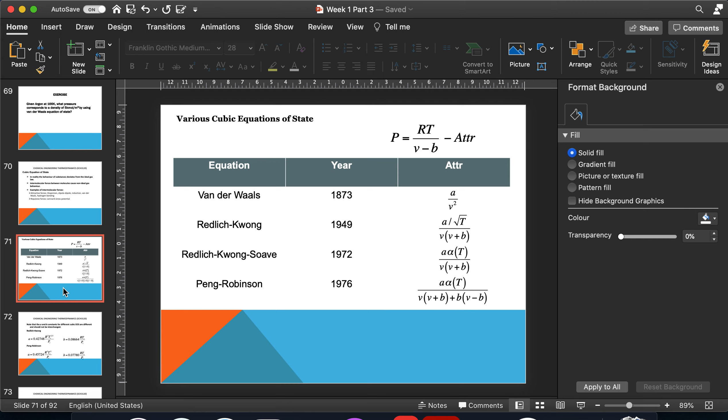Several attributes for the cubic equation of state, whereby it represents differently. So basically, they have A and B, but please be careful for Redlich-Kwong and Peng-Robinson, because their definition for A and B is quite different. So they should not be interchanged.

All right. So for Redlich-Kwong, you can refer to these ones, A and B is presented by this equation, by this term. And for Peng-Robinson also, this is respectively, it is almost equal, right? So don't be confused, just the value is different.

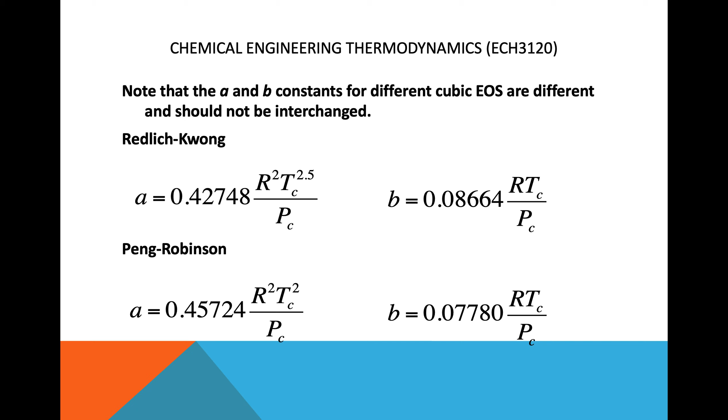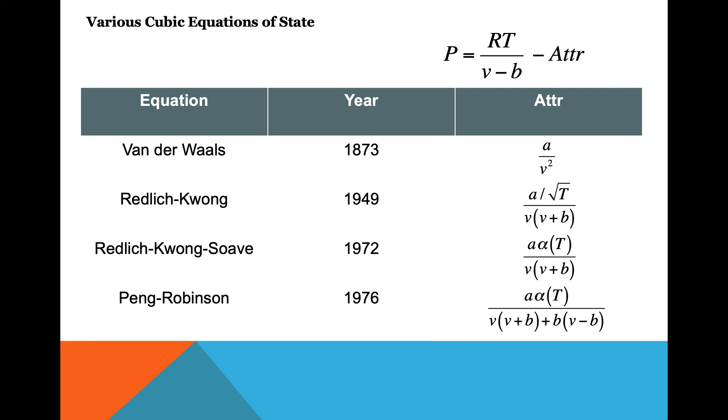Okay, I have one question for you. You can give your opinion in the comment section below. There are several and various equations of state, right? So can you identify, or maybe give an opinion, what are the differences between one equation and another? Is it similar, and if so, why? And if it's not similar, why? Okay. All right.

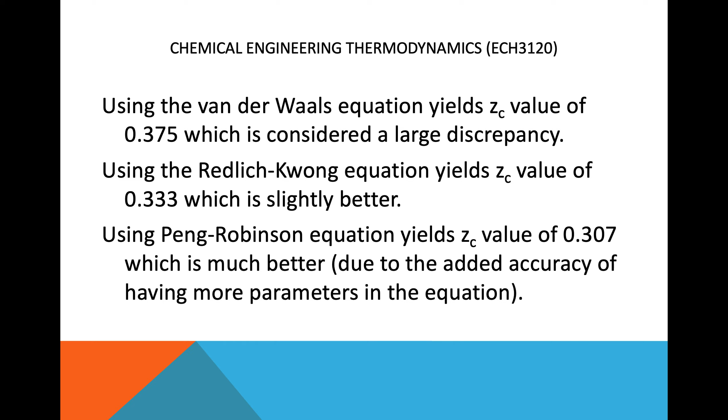Okay, using the van der Waals equation. Oh no, I think I have to skip that one.

Okay, next one is the virial equation of state, whereby the power series expansion in P is expressed as PV equals A plus BP plus CP squared plus DP cubed. If B we can represent as aB, C by aC and D by aD, then you can rephrase it as PV equals a times, in bracket, 1 plus BP plus CP squared plus DP cubed, and so on.

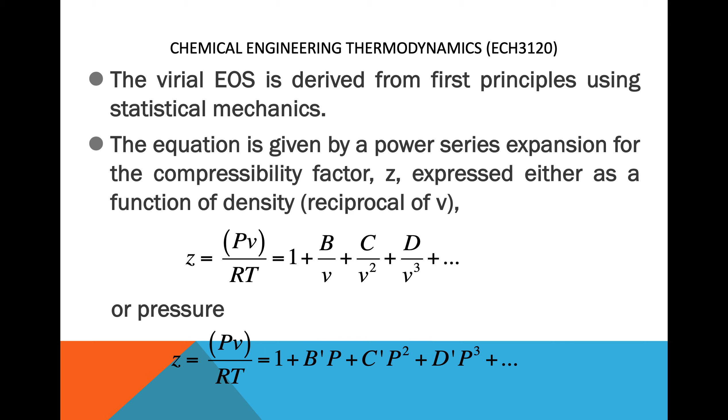For the virial equation, the virial equation of state is derived from first principles using statistical mechanics, and the equation is given by a power series expansion for the compressibility factor Z, expressed either as a function of density, which is the reciprocal of V, PV/RT equals 1 plus B/V plus C/V squared plus D/V cubed and so on, or pressure. It can be in terms of volume, reciprocal of volume, or pressure. So for the pressure, this is accordingly.

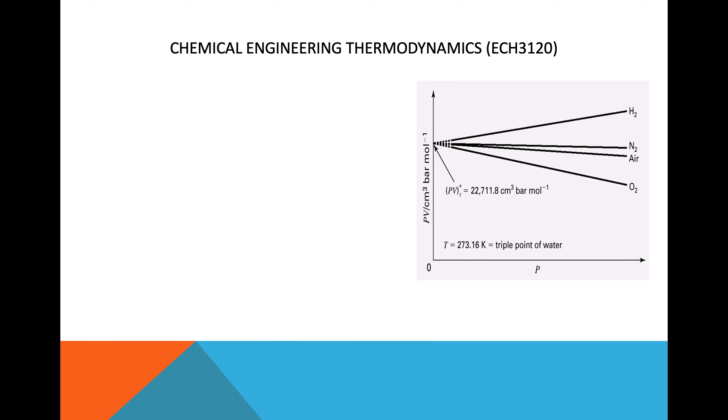And we can see that for the ideal gas, at constant temperature, as P approaches zero, the limiting value of PV will be the same for all gases. In this limit, it becomes PV equals a, a function of T, because the limiting values are used to establish a T scale which is independent of the gas used as the thermometric fluid. So this is one statement that you can take note of.

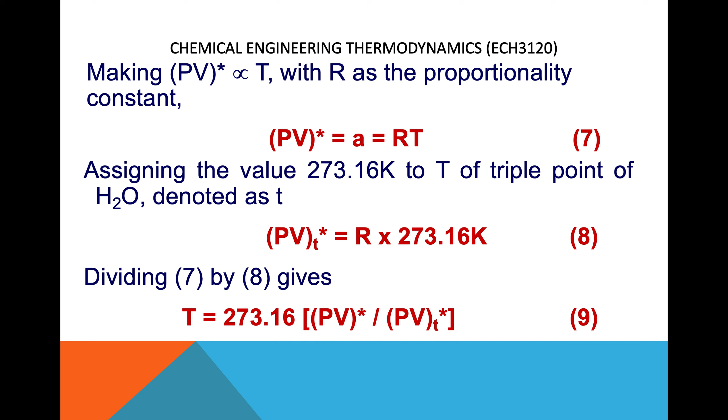So if we rearrange again, making PV equal to a, equal to RT as the ideal gas, and assigning the value of 273.16 to the temperature of the triple point of H2O, it can be PV equals R times 273.16. Yeah, that's the triple point for water. And dividing 7 and 8, we get T equals 273.16 times, in bracket, PV over PV at the triple point, because RT can be represented by this one.

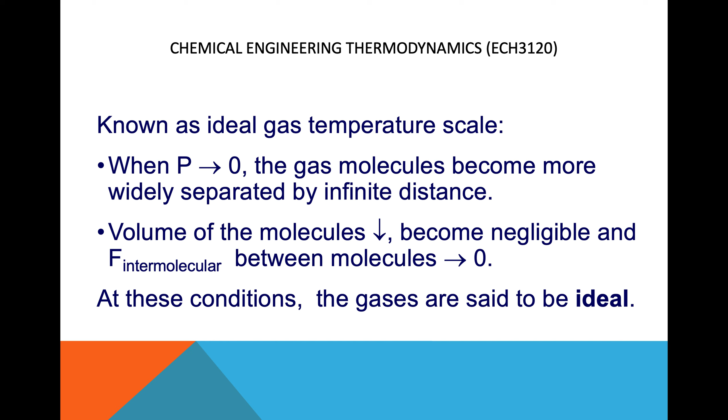This is known as the ideal gas temperature scale, whereby when P approaches zero, the gas molecules become widely separated by infinite distance, the volume of the molecules becomes negligible, and the intermolecular forces between the molecules approach zero. At this condition, the gases are said to be ideal. So this one applies to the ideal gas.

And B, C, D, etc. are the virial coefficients, whereby B' equals B/RT and C' equals (C minus B squared)/(RT) squared. In conclusion, which power series to use truly depends on which parameter is needed. It might be a different equation of state and different terms, so it totally depends on which parameter is needed in the question or situation.

For relatively low pressure, up to 15 bar, using the pressure expansion series up to the second virial coefficient is sufficient. For higher pressure, up to 50 bar, using the density expansion up to the third virial coefficient is more accurate. So these are the tips for the virial equation, especially for the second and third terms.

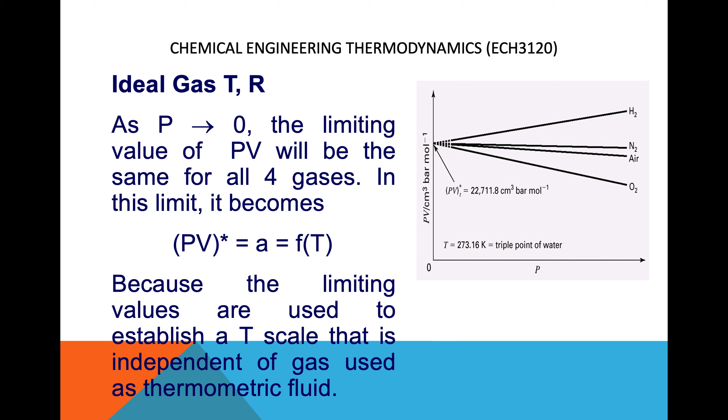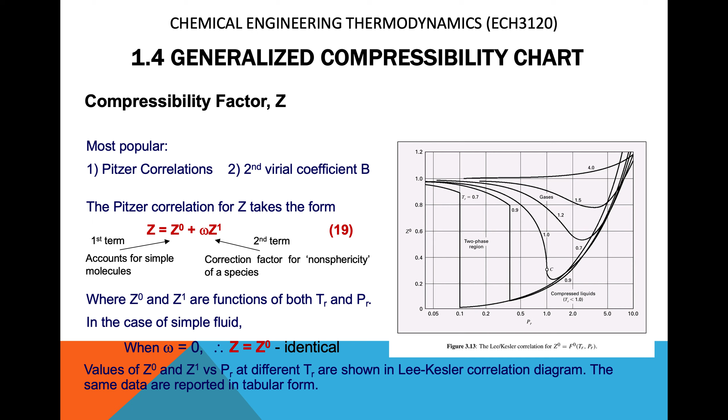Okay, we move on to the general. Sorry, this one is not covered. Okay.

There's one thing, maybe you can call it tips. If it's water, or in the form of steam, you can refer to the property table straight away. And for ideal gas, for example air, nitrogen, helium, you can use PV equals mRT or other suitable relations, and h equals Cp T, and u equals Cv times T. So basically, these are the main guidelines for water and ideal gas.

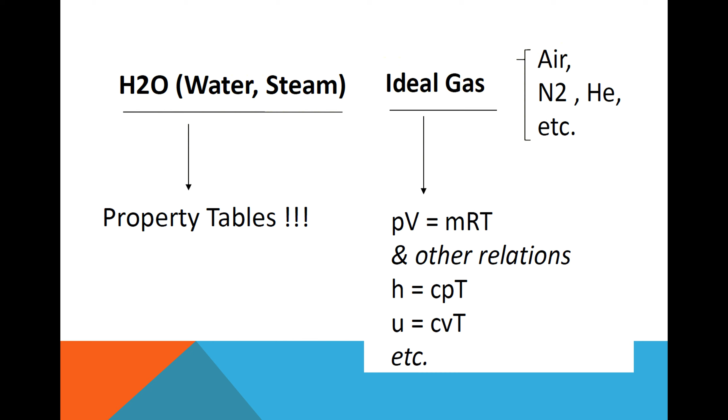Another point: if the situation mentions a rigid tank, then it should be constant volume, V is constant, and for a frictionless cylinder or freely moving piston, it should be constant pressure.

Okay, so I think that's all for today, and I hope you really understand, especially how to derive everything. Basically, you just have to understand the equations. You don't have to really memorize them, because usually they will be given, or you can bring the equations. So I think that's all for this chapter.

For a reflection or insight, maybe all of you can give a recap on what you have covered in chapter 1, volumetric properties of pure substances. Okay, all right, thank you.